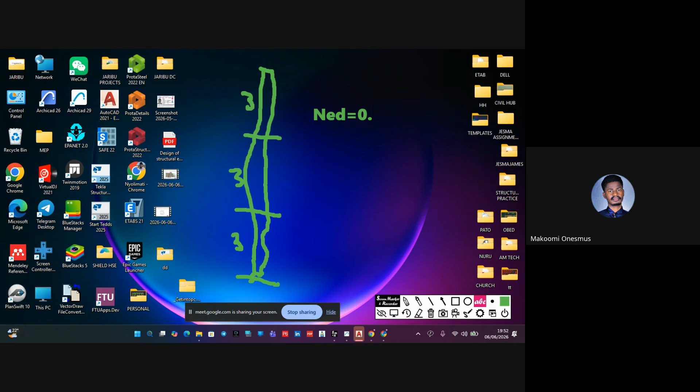Now, to calculate the preliminary column sizing, to calculate the size of the column, it's calculated from this formula of the NED. The NED is the axial load on the column. NED should be, greater or equal, that is the design load, it should be greater than or equal to

0.85 FCK over 1.5 times the area of concrete, plus FYD times the area of steel. Of which FYD equals FYK divided by 1.15. The design yield strength of steel is given by FYK divided by 1.15. You get that? Yeah.

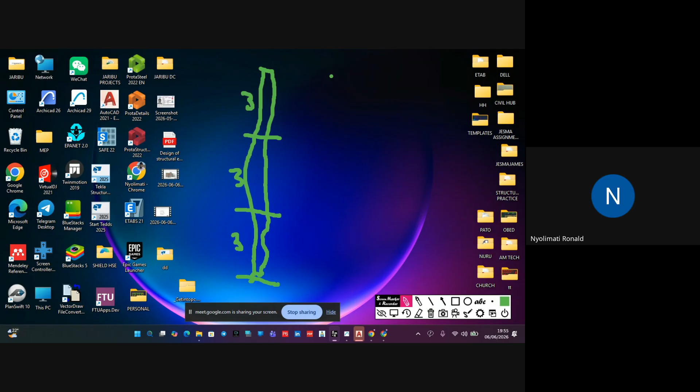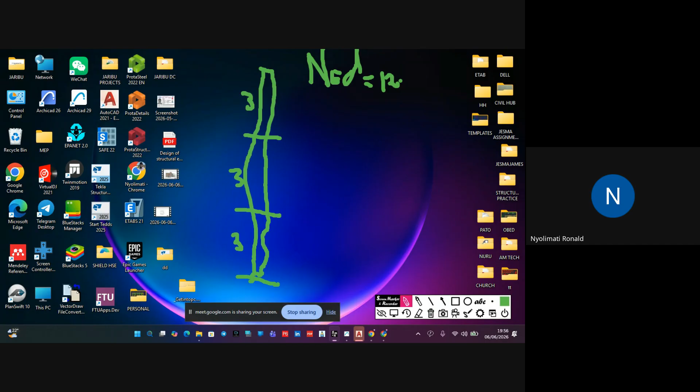your Eurocode is saying that, since you have not yet calculated the loading on each floor, the loading carried by each column on each floor, you have to assume the NED at this point. You have to assume your NED is between 12 kilonewtons per square meter and 15 kilonewtons per square meter. That is the first thing you have to consider.

Then, thereafter, you need to calculate, considering this NED comprises the slab load, the finishes, the live load, and the whole load, including the beam. So you assume this NED is composed of all the loadings from the different structural members. You understand? So from that point, you calculate the total loading for this column, what this column carries. The total loading TL is calculated from how many columns are here. There are 3 columns, okay? You understand?

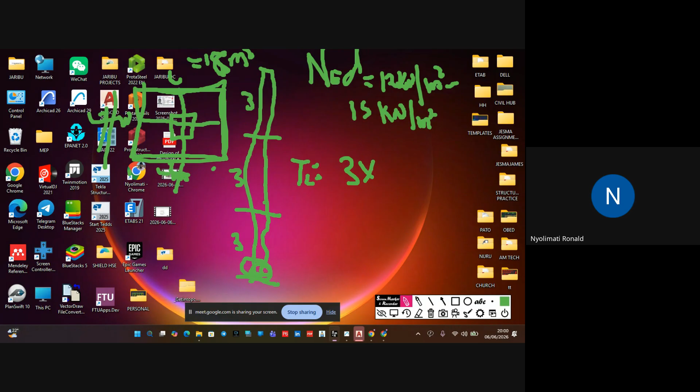I think I call. So, okay, excuse me, we continue. I was saying, yes? Next one. Hey, yes, I had waited.

Okay. I was saying, each floor carries what? We assume each floor carries 12 kilonewtons, the NED, the loading on each column. 12 kilonewtons, then multiplied by the tributary area we calculated here, which is 16. Then multiply by how many columns there are: 1, 2, 3. Then multiply by 3. What are you having?

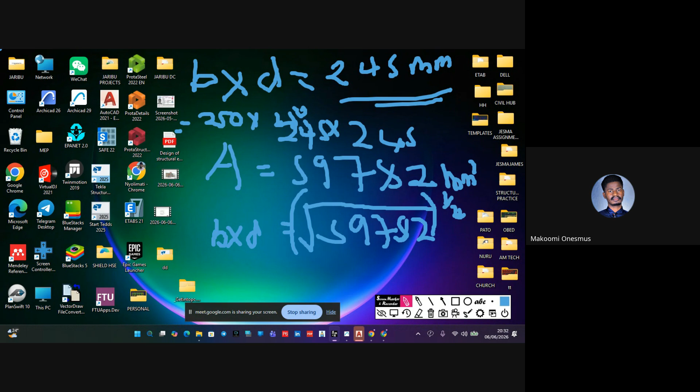Before we go to? We go to how to calculate the loading that we can put in Tekla. I wanted us to load that structure in Tekla today. So does this thing have to be calculated like this always? And that one you also calculate it. Should it be that a column always has to be a square?

No, you just calculate. You only calculate for dead load. You don't calculate for live load. Live load, you just go to Eurocode, you get it. For dead load, it's very simple. Remember, the self weight of the beam will be taken by the software. The slab load is also going to be taken by the software. So you just calculate the wall loading only. The wall? The wall loading, yeah.

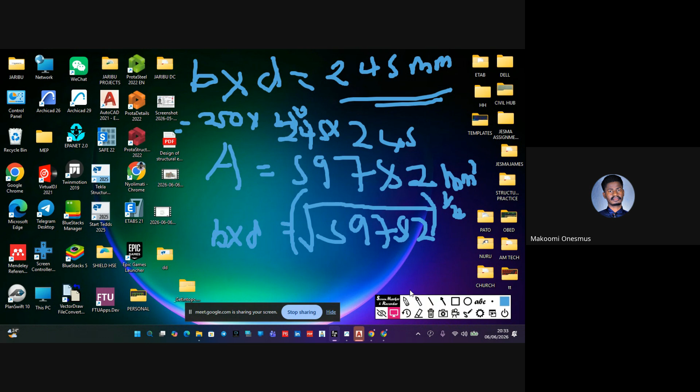Let me first show you a sample here. You have written this thing, eh? Yes. Okay. Now let me say you have a frame like this. So let me say this is the ground floor, and then this is the first floor, this is the roof. Okay.

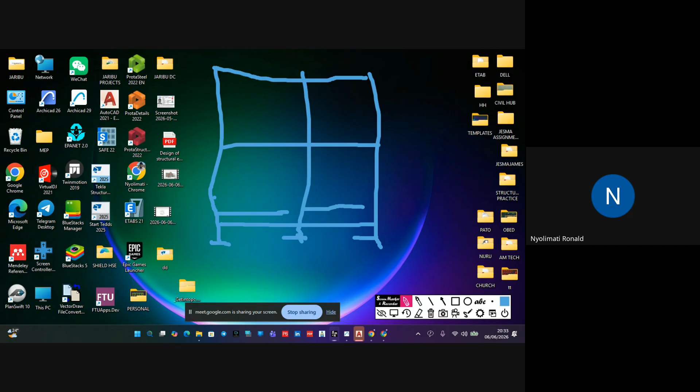So remember, since this is the ground floor, you'll have a wall here. But this wall is not going to be carried, it's just sitting directly on the ground beam, or maybe on the soil straight away. This one you don't consider. So what we are looking at is the load being carried by the column from above, how the column can safely transfer the load of the wall into the foundation.

So now we have this is the column and this is our beam. And we have this wall. This is the wall we are going to calculate the loading for. Okay? Only this, of which it's this beam that carries the load and takes it to the columns on both sides. Okay? So if we have something like that, let me draw with this. Let me say this is our column, okay?

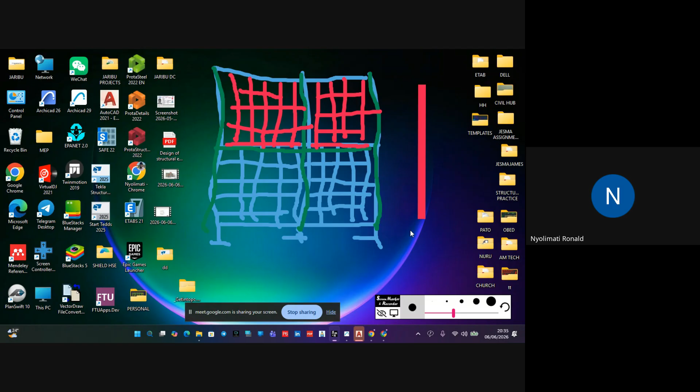If this is our column, let me take this guy. It's right here. It has a beam down, it has a beam up. Okay? Let me take it like this. So it has a beam. Let me say we are using a beam of 400 by 200. Okay? You understand?

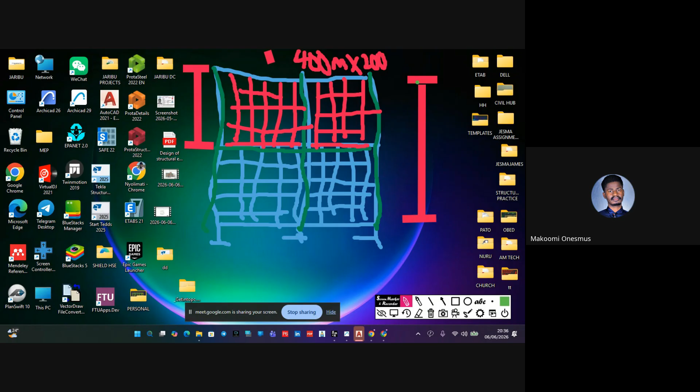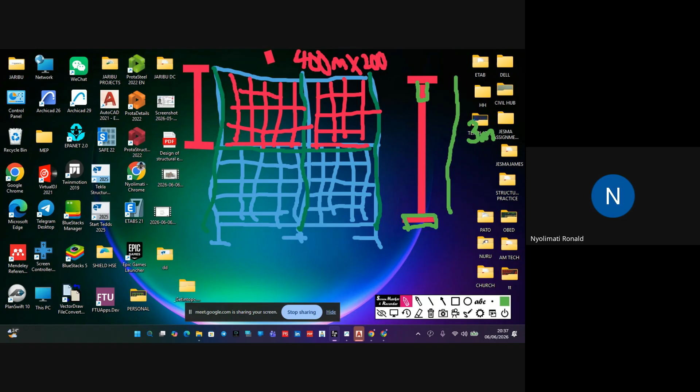So just say we have this beam. This is how the beam drops. Okay? So let's say our wall height is like this. We have a wall height of 3 meters. Okay? So the wall height we are considering, which is being carried by this ground beam here, this downward beam, is the height from here up to here.

Remember, this beam is already part of this floor. Okay? So to calculate the height of the wall being carried by this beam, let me say H. H equals the total wall height, 3 meters, and you deduct the depth of the beam which is dropping here. The beam is 200 by 400, so you deduct 0.4.

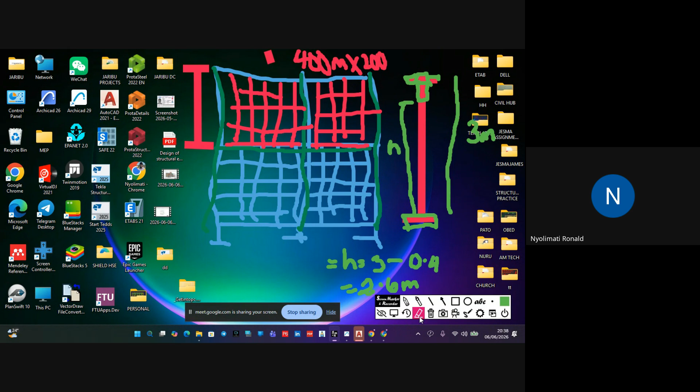So you're going to have 2.6 meters. Okay? Now we are calculating the weight being carried by this beam. Let me delete this now. So to calculate the GK of wall, it is calculated from the thickness of the wall multiplied by the height of the wall, then multiplied by the unit weight of wall. Okay?

The unit weight, for normal bricks, this is the unit weight of brick, not wall. The unit weight of the common brick that we are using ranges from 16 kilonewton per cubic meter to 22. So you can choose depending on the one you like. Me, I'm choosing concrete bricks, with a unit weight of 20.

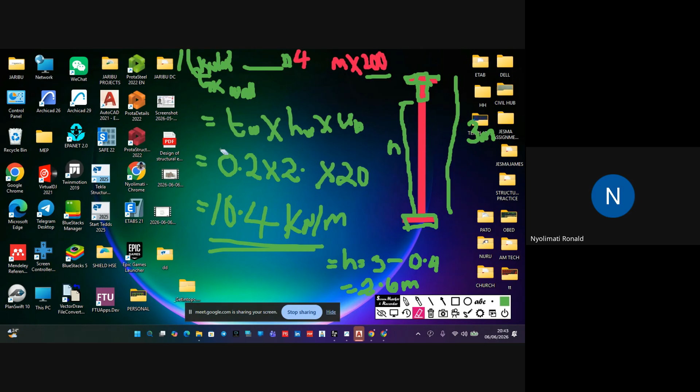Okay. The column I'm using maybe is 400 by 200. Now those columns like 400 by 200, do you know why they are used and how they are used? Let me first give you a scenario like this. You have written this thing down, eh?

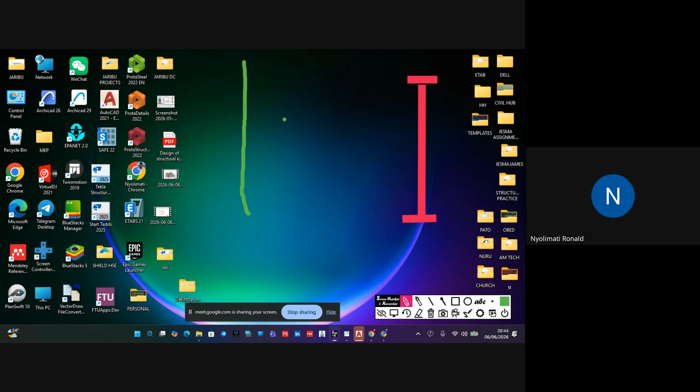You know, when you're constructing, you also consider neatness. And if you look at a column of 200 by 400, number one, the person is trying to dodge the what? Like this is your wall, and this is your wall. Okay. So this is a wall, also this is a wall, and also this is a wall. So if you have to see columns like 200 by 400, they are placed in a way that it should not have funny shapes protruding outside.

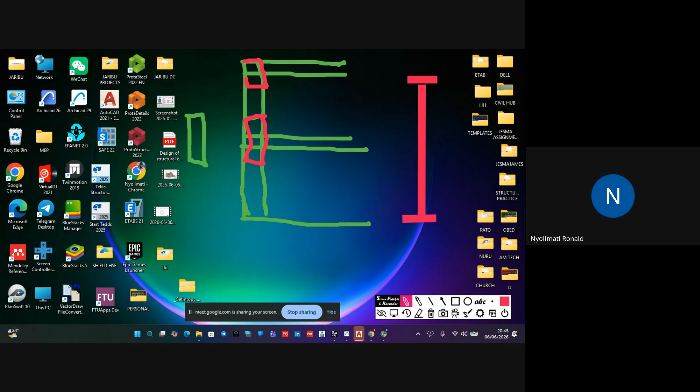Okay? If you're using column 400 by 200, normally you may find the 200 is the thickness of the wall. So they're just trying to align it. For example, 400 by 200, you may find they are putting it here, here, 200 by 400. Even here, they can put the 400 by 200. They're going to put it here to prevent those bad looks. For example, if you're using 200 by 200 and your column comes up to here, remember, your wall has stopped there. Your wall has also stopped there.

So this preliminary member sizing helps you to know the size of the column you should use. Remember, you are doing the preliminary sizing without knowing the size of the column, okay? So now, you consider using this kind of column where need arises. You understand? You consider using this one where need arises.

Now, for example, you have a long stretch, let me say 5 meters. Between here and here is 5 meters, okay? So when you look at 5 meters and you have a column of 250 by 250, you put 250 by 250 here, and also 250 by 250 here. It means the span of the beam is very, very long. And if you look at this, it's exactly at the end point, where these two meet, there's no overlap. So you will look into use of a column which has a large surface area to hold the point load from the beam.

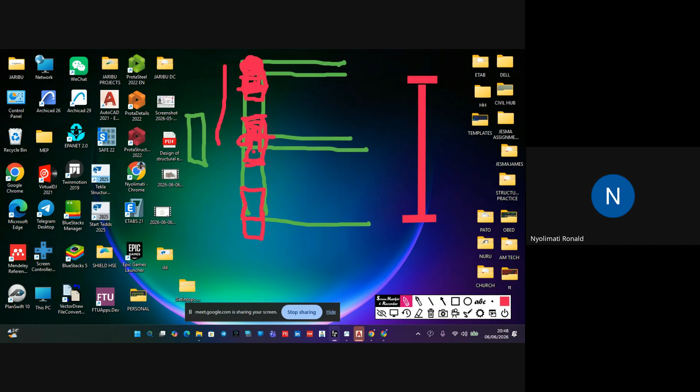Yes. So this one now has a wider surface to carry load from here, from this end of the beam, and also up to here. So this one easily distributes, it easily carries load from different beams. Okay? You understand? Yes. So anything there, just ask me before I continue. No, it's okay now.

So we have that. Let me take you to the software, Tekla. I had a software called Tekla Structures. I found that I've deleted it, man. How? Yeah, it is heavy software, but it is very, very good. You just deleted or uninstalled? I uninstalled. I didn't know. That day when I wanted to install this software, I found that I had uninstalled the other one. I'm installing 24 for this one.

So let's have a building: ground floor, first floor, second floor, then the roof. Okay. This is our foundation. Then this is our ground floor. Then this is the first floor. This is the second floor. And this is the roof level. Okay? Then let's have this one be -1 because it's going in a negative direction. So let's have wall height 3.

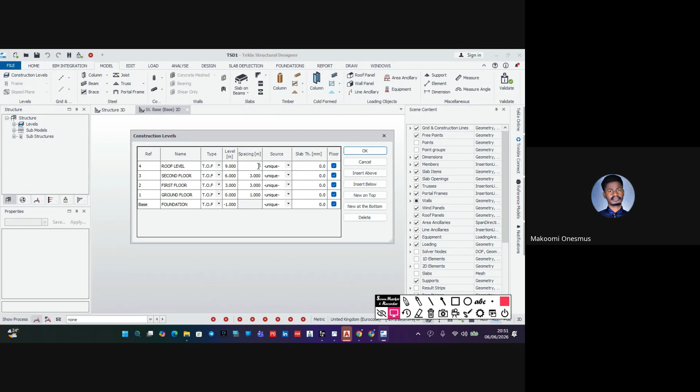Why don't we start and move together in the software? I had this. This is recorded already. The video is recorded already. Okay. You are seeing it. Now, for you who have been practicing, you just pick something. So I wanted us to finish at least 10 minutes past 9.

So I wanted this one to replicate 2, okay? I wanted the first floor to replicate 2. Even the roof floor to replicate this, but I'll change the roof floor. On the roof, I want a slab of 100. Here I'm going to use a slab of 200. We calculated it last time. Also 200. Okay?

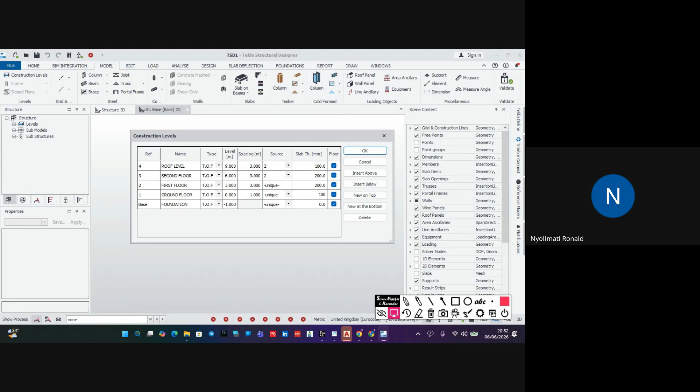Understand? Yes, I think you can still remind us of the beam depth we calculated last time. You have it. The beam what? The beam depth, the size of the beam that we calculated for last time. We had...

350? Okay, let me first reach there and then we continue now. The section was 200 by 350.

Okay, let me first go to next. Let me set the grid. So here we are going to have maybe 1, 2, 3.

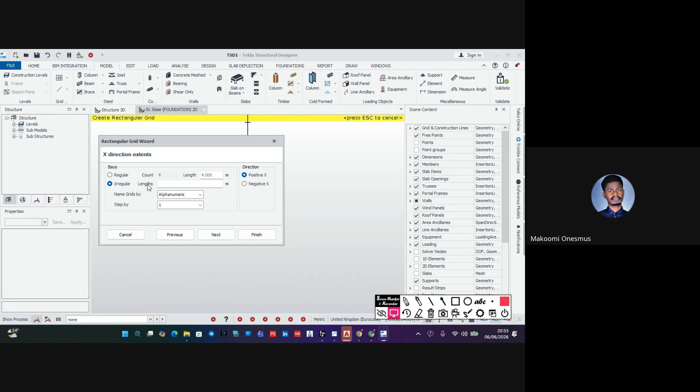Let me use the spacing of 4. Make something irregular, so you make something irregular, like for example, let me start with 5 meters, then 4.5, 5, 3, 3. Okay, let me have something like that. 1, 2, 3, 4. Something like that. Yeah, that is so good.

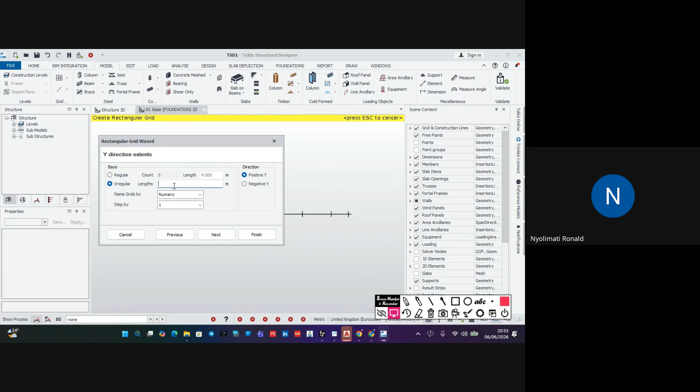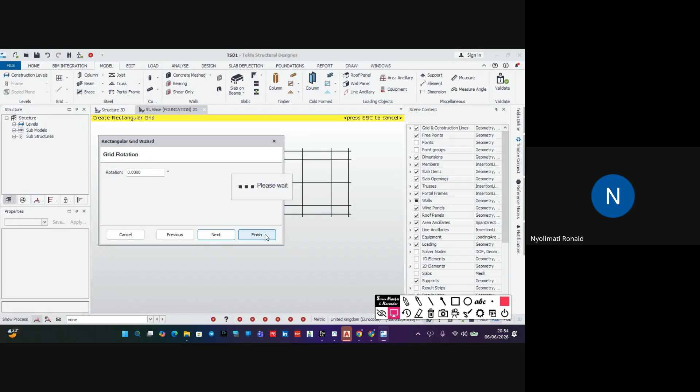We have this next. Here, let me say I have 1.5. That is the first. Let me say second, I have 4, I have 4, I have 1.5. It's like a building which has a front here and a front on the other side. Say next, finish. So this is what I have. Okay.

So I go to column. Okay. Then when I reach column, I run to the properties.

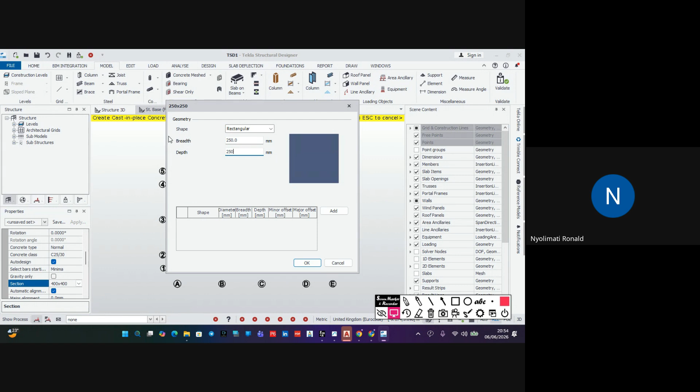The concrete class I'm using is C25/30. Then I come down here, the column section. We are using 250 by 250. Okay.

Come and check, let me change this one to 30. The concrete cover, nominal cover, let's have it 30. And then automatic alignment, this one you always have to check it. Okay.

Now when you reach here, you just click up there and drag here. It's for you the column. Okay. Yes, you put it in 3D and see. You have the column, you rotate it like this. Okay? Yes, click escape.

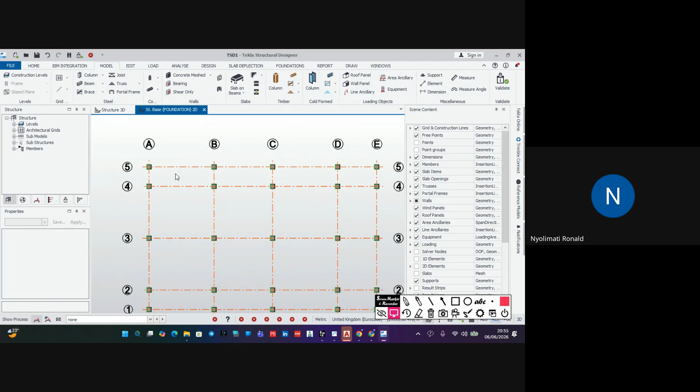Now, you don't draw beam from here. You right click and go to open with first floor. Not even ground, you go to first floor.

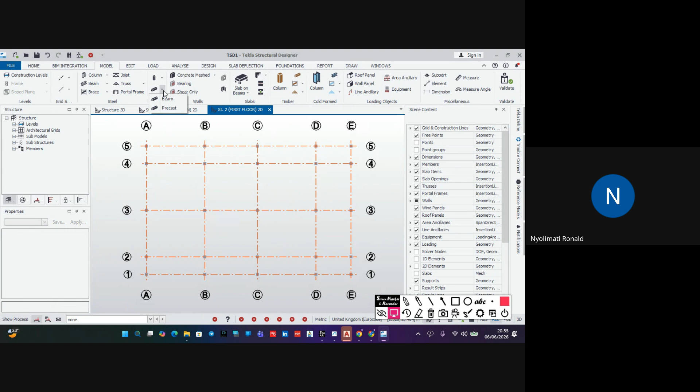Okay, so that's what you see from the first floor. So I come to beam. So I'm using, let me come here. You come, you leave this one rotational, you leave nominal. Concrete type is normal, you change the concrete class C25/30. You drop down, then you have sections. You come, click here, okay?

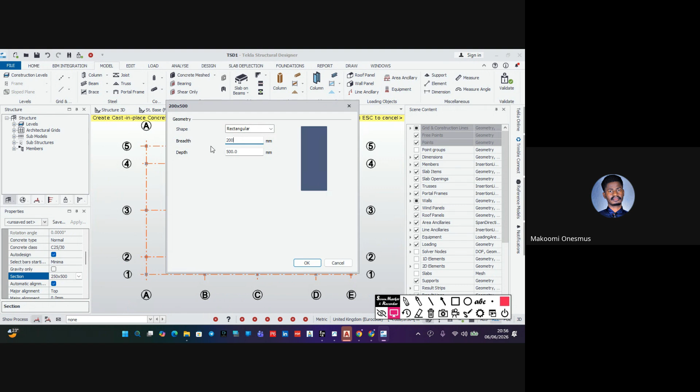Then you leave major alignment here, it is being aligned from top. Check here. Yes, we have it. Automatic alignment, you leave it. Automatic alignment - no, for that one you only uncheck for columns, for column. But for this one you just leave it.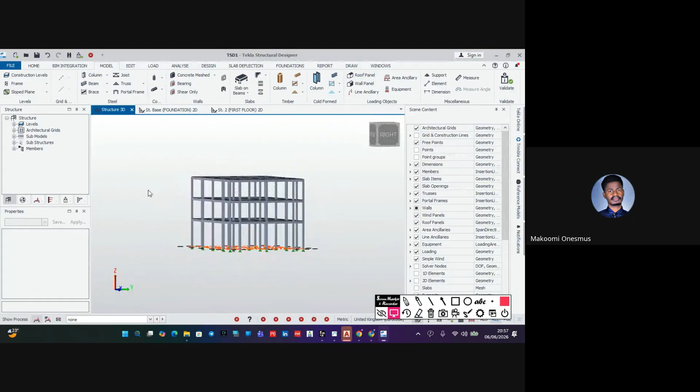Okay, then even here you highlight there, you drag it down. You have your, you put it in 3D and check. You have everything, okay? You see how easy Tekla is? Yeah, very, very easy and very, very quick.

Yes. Now, remember this guy here is the roof, and this guy down here - and this one is carrying normal loading. So this is a ring beam. This ring beam is carrying a roof load.

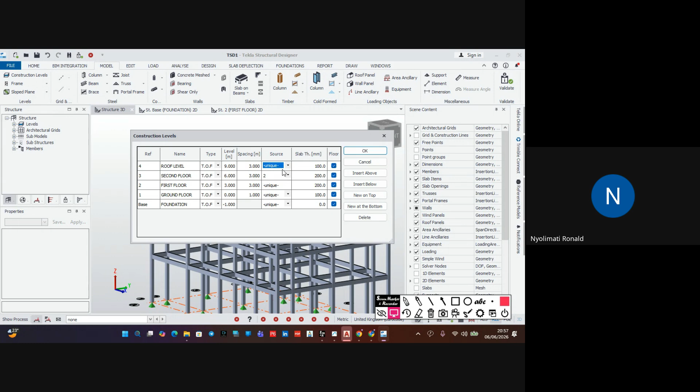So you consider it to be the roof load. For that matter, you go to construction level and change it to be unique, such that you won't have the same slab settings. Okay, you go to first floor.

Then you go to slab on beam. You first click, you escape it. You go to slab, then you go to slab on beams. You come here, you override the slab depth. Then we got slab depth to be 200. Then you drop down here.

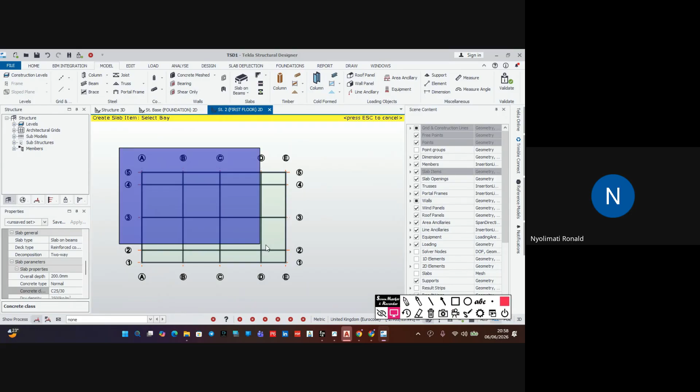You change the slab, the overall depth to be 200. Then you check, you change this one to 25, 30 - it's cover. Then you click up there, you drag down. You understand? You check in 3D, you have everything.

Is it okay? Okay. Any question? Any question? No. Okay, you go there.

Then I want to go to the roof. You say you open with the roof level. I click there, you understand? I go to slab on beam, and I don't override the slab depth.

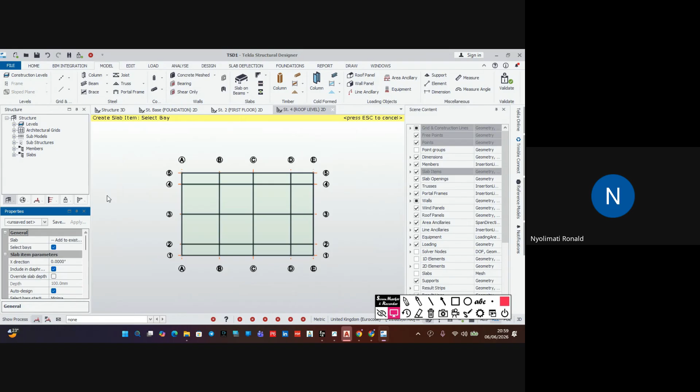Now for the beam, you can leave it 100. You want to come and change the concrete class, you change it to 25/30. You understand? You put it there. When you come to 3D, you now have everything. Okay?

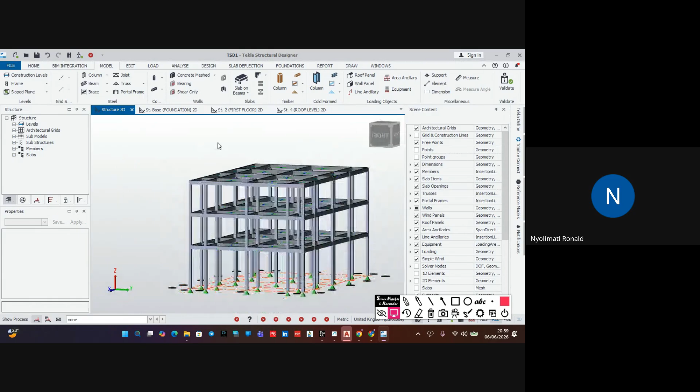You now have everything. Now you have drawn your thing like this. You come here and click validate.

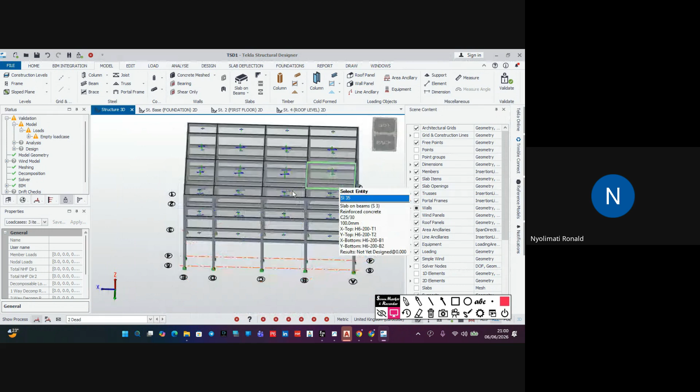So if you have this, come and check why is it. Check loading - no, empty load cases - no, this one your validation is okay. The moment you see this, it means it is showing you that you have not done something, but this one is still okay. If you have seen XX, it means you have a point which is not connected somewhere. You need to go and connect it. You need to go and work on it. You extend it, you remove it - you either remove and put it again, or you extend if you can.

Yes, here now we are ready to do our loading. So I said we have our GK, we got it. We got it as 10.4 kilonewton. Okay, you need to find the QK.

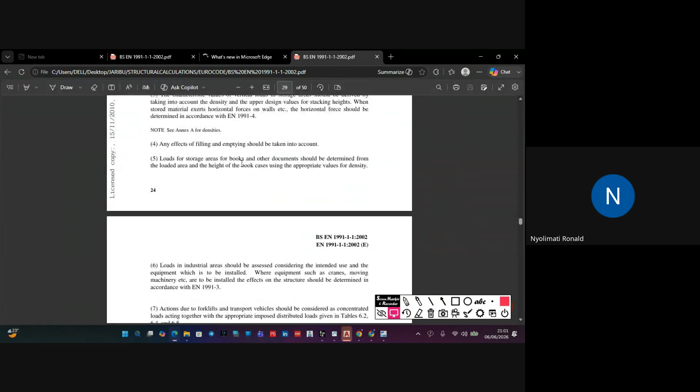For us to find the QK, you come to Eurocode. Let me take you to - this is Eurocode 1, 1991, Action on Structure. So you come to page 21. This is for free, let me go up. Page 21, yes, page 21 is here.

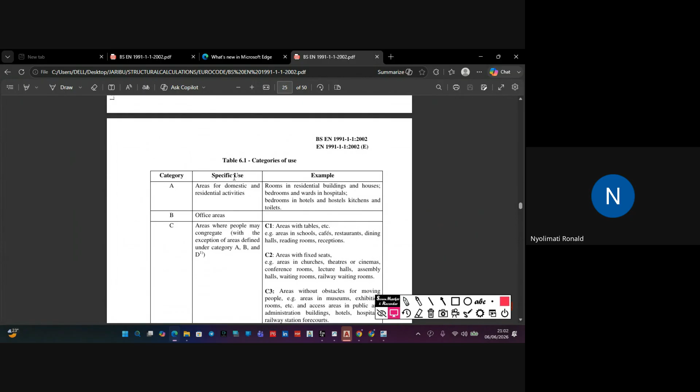Have you ever seen this table? Yes, table 6.1 is talking about the loading of structures. We have different categories of structures - category A, category B, category C, and category D.

Category A is saying category A is for areas for domestic and residential activities. So it means if you are designing for a structure which is going to be for residential activities, like where people live, just like homes, that is under category A. So they're saying, example, rooms in residential buildings and houses, bedroom and wards in the hospital, bedrooms in the hotels and hostels, kitchens and toilets.

So we are designing for residential buildings. For that matter, your residential building is under category A. So you use table 6.1 in conjunction with table 6.2. So you come and pick category A, then you scroll down to table 6.2. So if you reach table 6.2, you come under category A. When you come under category A, what are you loading?

Are you loading floors? Are you loading stairs, balconies? Remember, if you are loading a slab, it is under floor. Slab is under floor, even staircase is under floor.

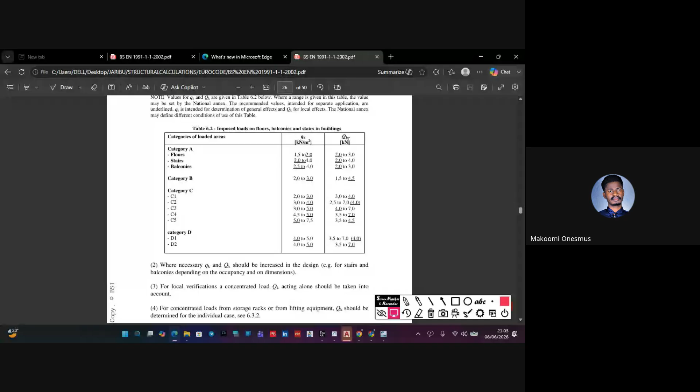So you come to floors and check the loading. So they are saying for floors, the loading has to be between 1.5 to 2. He's saying it has to be between 1.5 to 2, so they have underlined 2. It means 2 is the maximum - I mean the worst condition case. The worst condition case is 2 kilonewton per square meter. So it means for residential building and all loading of floors, it has to be 2 kilonewtons.

So this is the axle loading - you don't consider this kilonewton, this one. Of course we don't consider this one being spread over a meter. This is distributed, this is like a point load. So since it has been distributed over a specified area, you consider this one. So for Q, it means our QK, you come and select 2 kilonewtons per square meter.

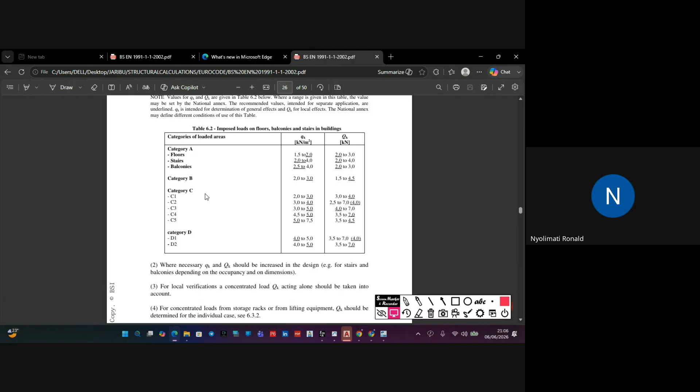You now have QK and GK. Now also you have to consider the roof. The roof loading is also a live load. And the roof loading - it caters for, actually the ring beam caters for the loading of a beam, of a roof. So the slab you have placed at the top roof is considered to be the loading of the roof. Okay, so for that, hope I'm not too fast.

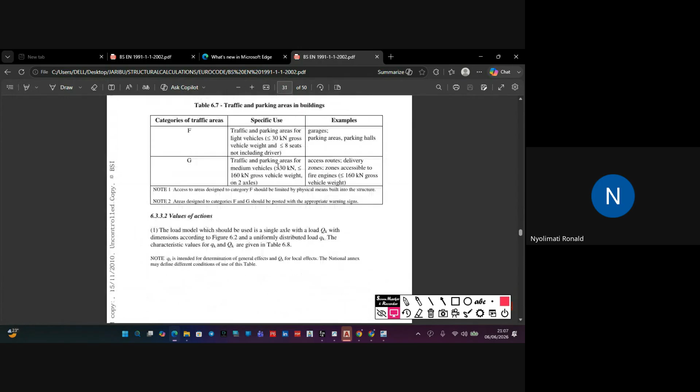So for that matter, you come to roof loading. This is categories of storage - this is industrial area storage, this is floors, industrial area floors for roof. You come down here, this is traffic parking areas. For roof now, categorization of roofs - they are saying categories of loaded area, specific use number 1. We have roof of category H. They're saying roofs not accessible except for normal maintenance and repair.

They are those roofs, for example, on apartments where people can have their rooftops, their pergolas, they can chat around. Those roofs where people can sit and chat up there, so they are treated under I.

There's category K. The roofs accessible for special services such as helicopter landing areas. These roofs are those ones where even helicopters can land. These are the roofs, for example, where you can have a swimming pool up. Those are the kind of roofs. But for us, ours lies under category H, which is not accessible.

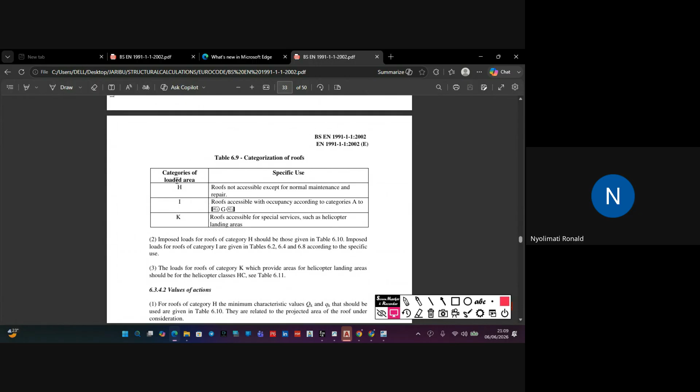So you come down here, they are saying impose load on roof. You come, they are saying for category H, QK may be selected within the range of 0.0 kilonewton to 1. And QK may be, between 0.9 kilonewton to 1.5. So it means our value of Q, remember, we can't select 0 because we have the loading from what?

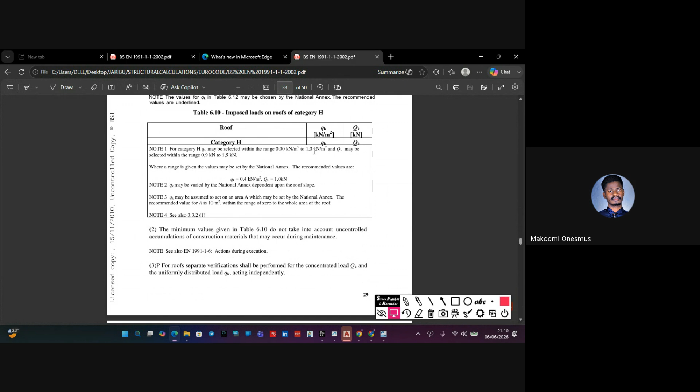From the iron sheet, the purlins, the timber, you know. So on my calculation, I found out that the loading for that roof, you can take 0.7, 0.6, 0.7, 0.8 there, okay? In that case, let's take the QK for roof to be 0.75 kilonewtons per square meter. Then let's go back to the software.

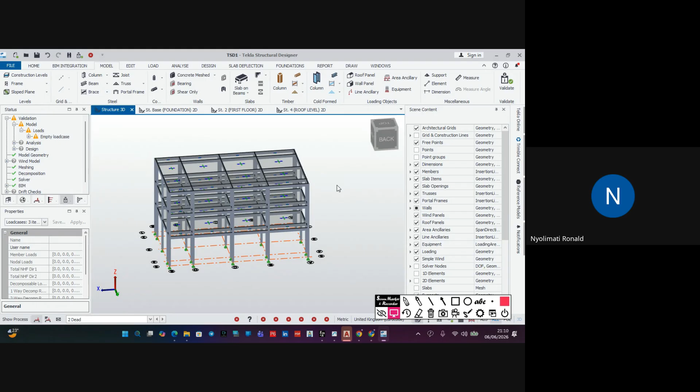Hope you have understood. The QK, was it for the roof or for the last one? There are two QKs: one for the floors and one for roof. For the floor, the one which was from 1.5 to 2 — the one expected to be 2 kilonewton is for the floor. Then they say between 0 to 1 is for roof, whereby I've decided to use 0.75. That's the one I've chosen.

So for that, I'm now coming to the loading. Let me finish loading and you stop there. Now, loading. So before you start doing the loading, you come and check down here. You are having none, there's no loading on this. So you come under none, you select which loading do you want to do first. The self-weight is already taken by the software — the self-weight of the column, the beam, slab is already taken. So now let me take what I'm going to put.

Even the service load is going to be filled when we are calculating for the combination — it's going to come automatic. What we're going to add there is the imposed load and dead load. Imposed load — you click on imposed load.

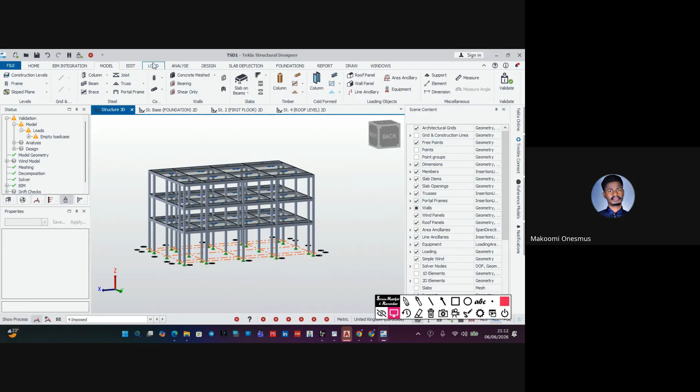So if you click on imposed load, you come to load. You have seen load, yes. So I click on load. Now, since you're loading a floor, and it is a floor that has a leveled surface, for that case, you either load a slab load or a level load. For that matter, let's take a level load. So we are loading a level load.

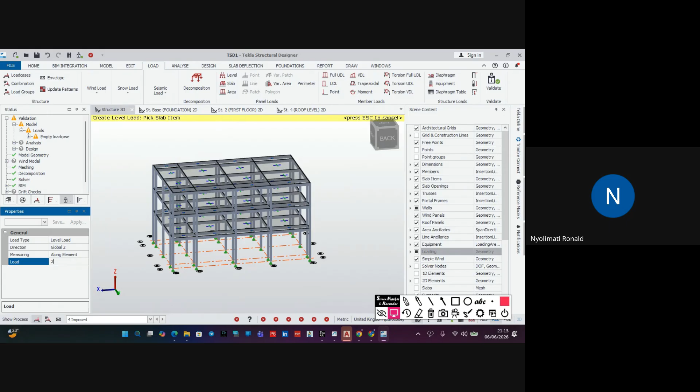Then you come to this table, the load table. You come to level load to load QK, which is the imposed load. The QK we have gotten for the level, for the floor, is 2. Now you have a QK of 2, you zoom and just put it on the slab. That is the QK you have put for the slab. You can see it from there.

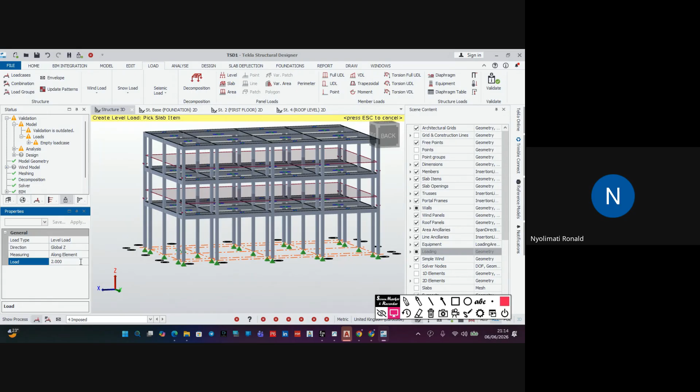Now I come back to the loading. I change this one to 0.75 — now this is the loading of the roof. That's why I had to make it unique, so I put it here. You can even see 0.75. Each loading is very small. Then I can click escape.

So if I come back here and put none, the loading disappears. I go back to imposed load. You can see we have our imposed load. If you put your cursor there, it's going to show you the loading on story 2, which is the first floor. It's having a load of 2 kilonewton.

The direction of the loading is what? It is global Z. The global Z is what? It is an axial load. It's a gravity load from up coming down. Okay? Then you also come and put on this.

It's saying now the load on story 3, which is the second floor, is 2 kilonewton per square meter. It's also a global load, in global Z. You can also put here and check. You understand? That's how you load it. You load a live load or imposed load. You understand?

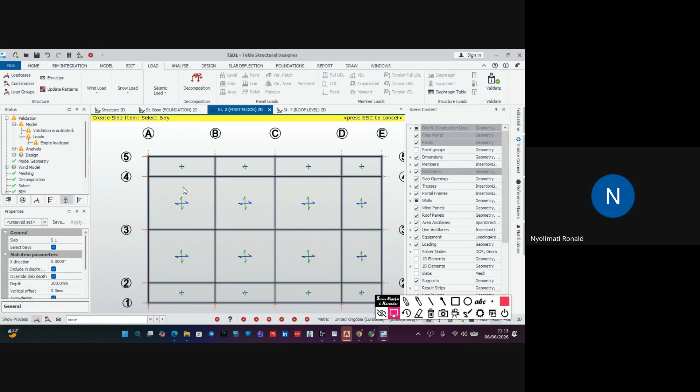Then now you go to the first floor, which is down there. Now I'm going to load the dead load, which is the GK. Okay. The first one we loaded was QK. Now we're loading GK, the wall load. Since it is GK and it is the wall load, it runs over the beam.

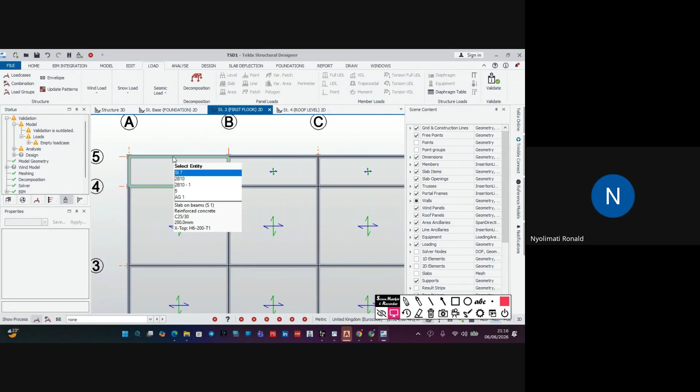Now, if you click on the wall, sometimes you can have interference from the slab. So for this matter, you need to turn off the slab. If you turn off the slab, you can easily load your wall on the beam. So you come here. There is this window of scene content.

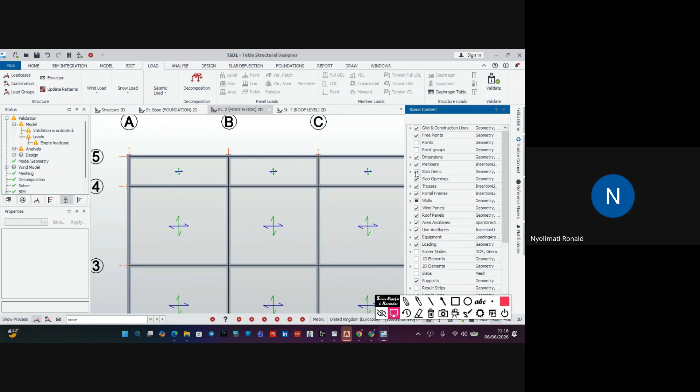When you go to scene content, you come to slab item. You turn it off. You uncheck that box, then the slab goes off. You will be remaining with beams alone. So you come down here and now change to dead load. You change to dead, okay?

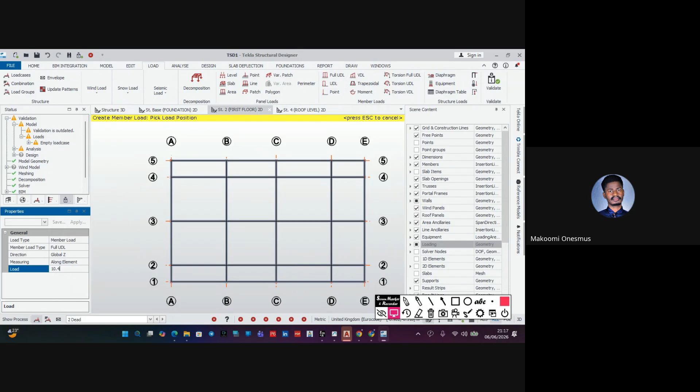Now this dead load is a full UDL, a uniformly distributed load. So you click on full UDL, then you change this loading to 10.4. Then you put it exactly where the wall passes. If there's a balcony, you don't load it there. Remember, on balconies there are no walls running around. So you just put it exactly where walls pass.

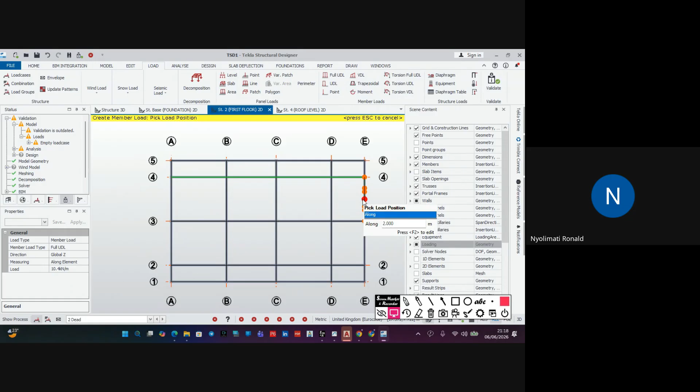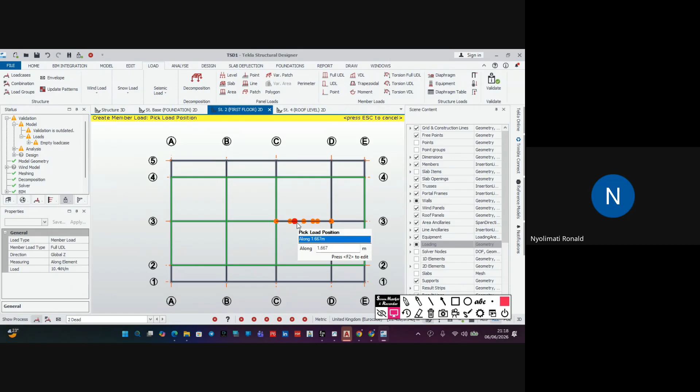You come and start looking. You can see this front part is a balcony, even this one is a balcony. So I just load where walls pass. I load this, this one, this. You just click on it. When you see green, just know it's loaded. Just click there. We are loading something like that, okay? Then after that, you click escape.

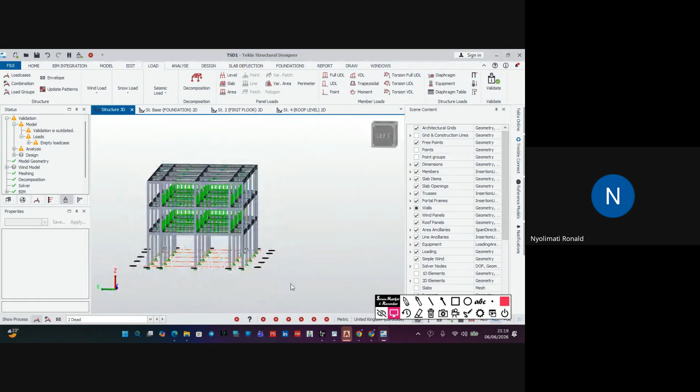Understand? Then you go to 3D. We had this command of imposed load on the 3D. So you change to none. Let's put our dead load. You click on dead load, you see? Our loading is there already. Are you seeing? Are you understanding something? Yes.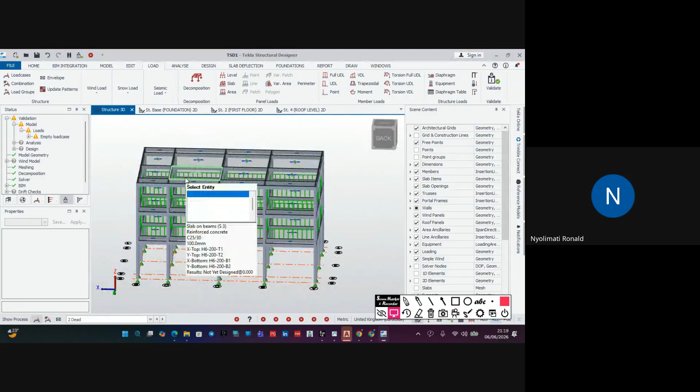So after loading like this, you click on validate to check. Yes, we have modeled everything. We have an empty load case; you leave it now. Can we stop here? I think it is okay.

So for the loading of the walls, after activating the load down here, you just go up there on full UDL. Then for the floors, you activate the load down, and then go to load, the imposed load, then you load what? Level load. Level load, okay? Yes. Oh, I get it now.

Okay. So tomorrow, not tomorrow, tomorrow is Sunday. I know when I say tomorrow, you're going to remind me. Actually, we were not supposed to even do this today. But since I promised you yesterday we'd do something today, I never wanted to break my promise.

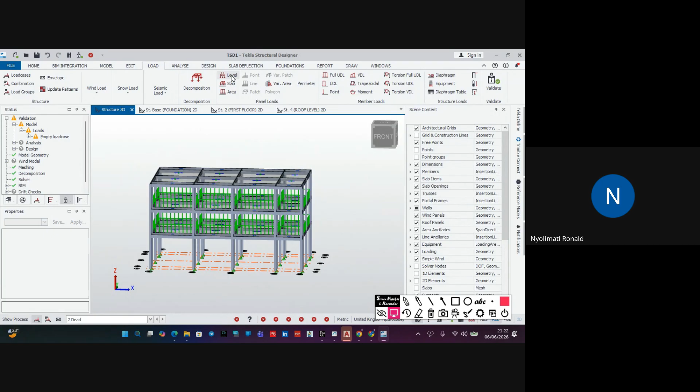Let me just say, if we are to take 2 hours, okay? This is the major thing. If we are done modeling, you know how to model. Yeah, okay? So I want you to follow exactly what we have done today. Then tomorrow, I want you to send me your work. Tomorrow or Monday. Not tomorrow, leave tomorrow. Don't touch my weekend. Okay, on Monday. You want the file or the what?

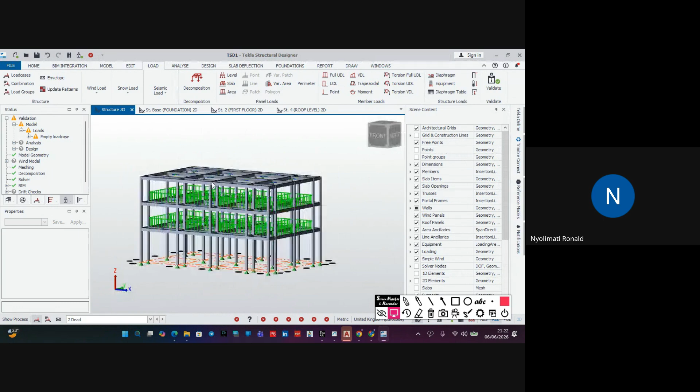No, I want you to model for me something like this and you load it. And I'm asking how do you want it, because you want to see the file? I want a file. From the file I can check the loading you have done. I can also check those sections, elements, your members. So please use the same. You can assume this, but I want you to come up with a structure like this. Then you write this down, the lessons that we have used.

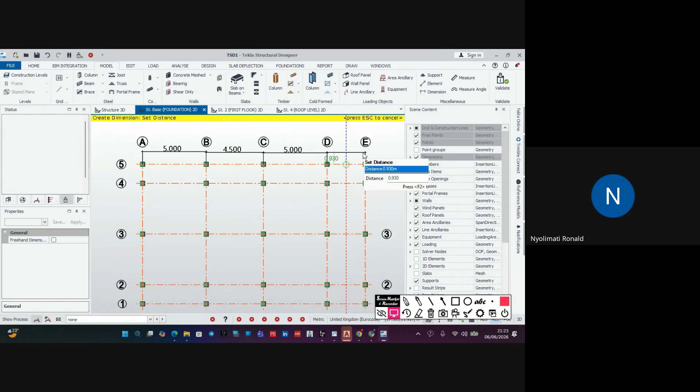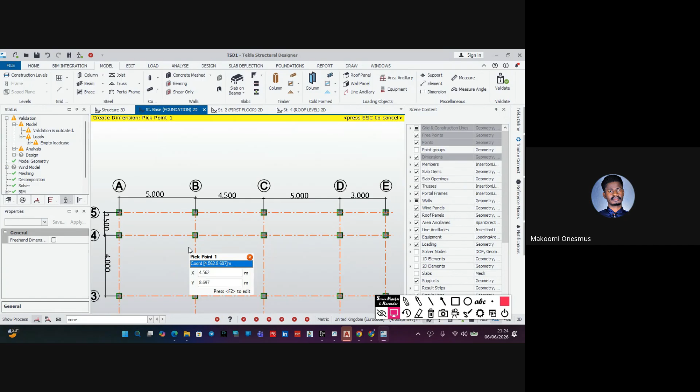This is 5 meters. This one is 4.5. This is 5 meters. Then this is 3. You write that one down. Then this side we have 1.5. And this side, just give me back the first one, the upper one. 4.5, 5, and 3. Yes. Then the other one is 1.5, 4, and again 1.5. For 2 times? For 2 times, yeah. I want it to come with something like this.

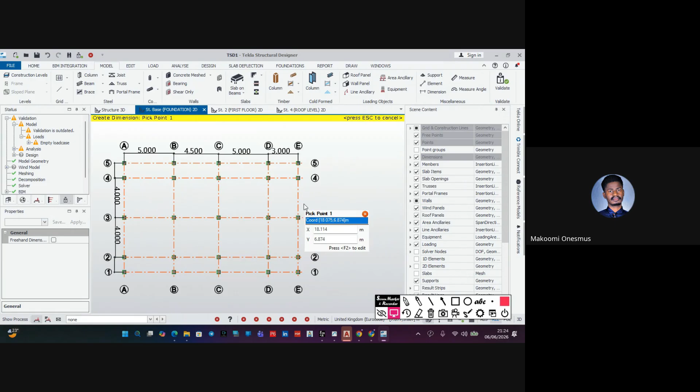So the columns are what by what? You have there 250 by 250. Then the beam is 200 by 350. The slab for the first floor and the second floor should be 200 millimeters thick. Then the one for the roof has to be 100, and also the ground floor should be 100. For the ground floor, you leave it, but from the setting there, construction level, you can have 100, but you don't put it down there. So I want you to come up with something like this. This is the assignment I've given you.

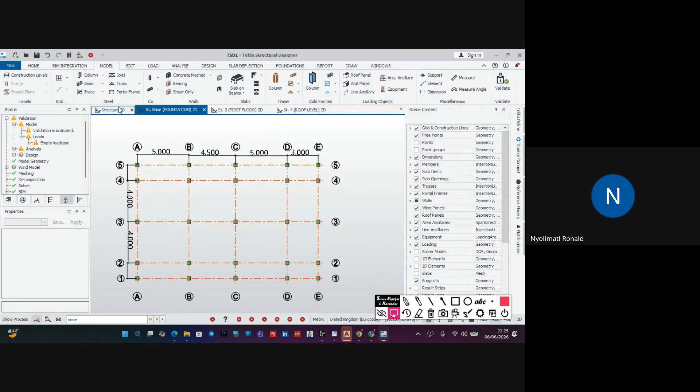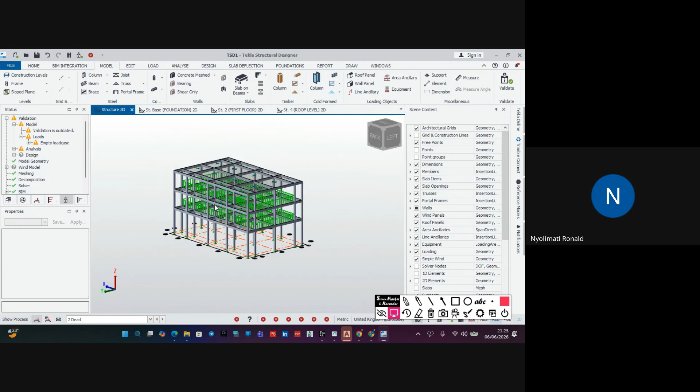In case of anything, you can wait for Monday or you can send me a message on my WhatsApp, and the message should be one which will not force me to open the computer on the weekend, when I'm in weekend mood. It's all right, it's okay. You can send me. I'm just joking. So you can send me anything, and we learn something.

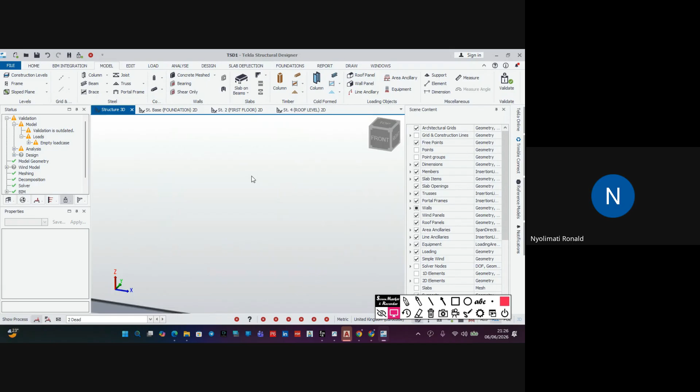I want you to produce something like this. If you want, I can even give it tonight, but I would give it on Monday. Give me on Monday, not tonight. All right. You have my email because I asked you to send me things like assignments. Then you send it on email. When you get time, send me the email on WhatsApp. So the assignment is on email. Okay.